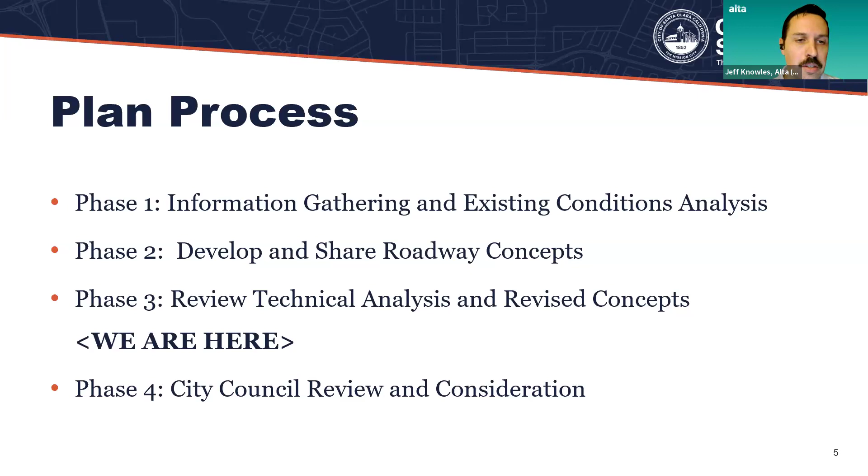In terms of our schedule, we're in those 4 phases. We had our first round of workshops last May to introduce the project and gather initial ideas. We held our second set of meetings in September to share those early draft concepts. And this is our third round of meetings tonight.

And I should mention where we're going from here. We'll have a BPAC meeting, and then City Council is scheduled tentatively for late summer, early fall.

All right, so I want to give you a little bit of background about the project. If you're coming in new to this project, you can go to the next slide. The study corridor is on Monroe from Lawrence Expressway to the San Tomas Expressway. This is a map that just shows that. As you can see, the corridor is primarily fronted by residential homes. There's also a school, Wilcox High School, right in the middle of this study corridor.

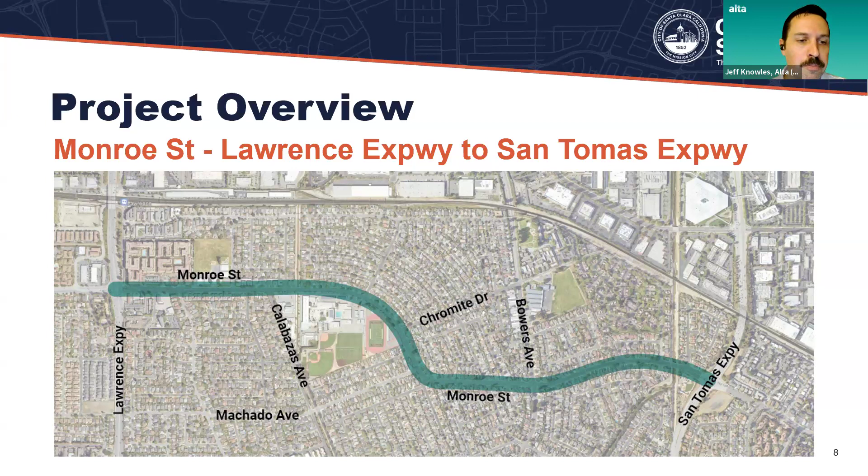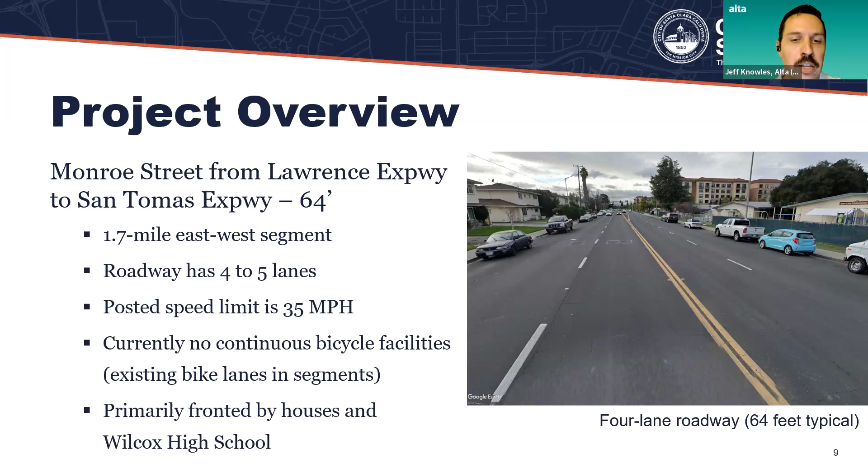In terms of roadway characteristics between Lawrence and San Tomas, it's 1.7 miles long. It varies between 4 and 5 traffic lanes. The posted speed limit is 35 miles per hour. Within the project area, there are currently no continuous bicycle facilities, but bike lanes start on Monroe Street east of San Tomas. The corridor is primarily fronted by residential uses and Wilcox High.

Our first phase of engagement involved 2 community meetings, workshops, an online survey, and 2 pop-up events, along with meeting with the BPAC, which is the city's Bicycle and Pedestrian Advisory Committee.

Phase 2, we had 2 additional workshops, another online survey, and additional pop-up meetings, which are events that we go out and hold in the community. Our staff and team met with the city's Youth Commission, the Senior Advisory Commission, Parks and Recreation Commission, and again with the BPAC. In phase 3, which is where we're at tonight, we're holding a public meeting.

There'll be an online survey, which we're going to talk about and share a link to. We have tentatively scheduled a pop-up event, and then we'll also be meeting with the BPAC to share this information.

Hopefully you saw us at the city's Art and Wine Festival back in September. We also were at the Christmas tree lighting in December. These are our pop-up events where we had a booth sharing out information with boards and gathering survey information and public input about each of the concepts.

In our most recent survey, survey number 2, we had 118 responses, of which 15% were affiliated with Wilcox High School. We asked for the level of support and feedback on each of the proposed concepts.

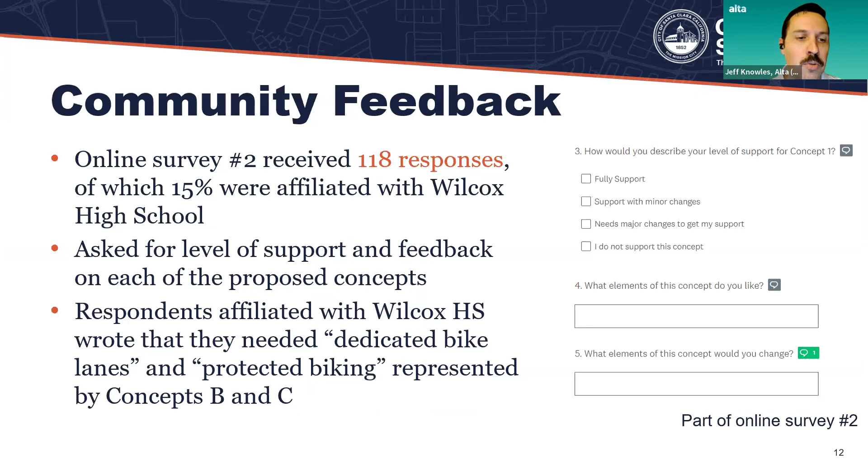Respondents affiliated with Wilcox High School wrote that they desired dedicated bike lanes and protected biking, represented by concepts B and C, which we'll share out in just 1 minute.

Some of the results of these concepts - again, there were 3 concepts that we're asking for feedback on. Concept A is 2 lanes, center turn lane, adding buffered bike lanes continuously along the corridor, and retaining parking on both sides of the street. That received full support at 28.6%.

Concept B, which is going down to 2 lanes, 1 lane in each direction, a center turn lane, and then parking-protected bike lanes, had 51.2% fully supported. This was the largest body of support for any concept.

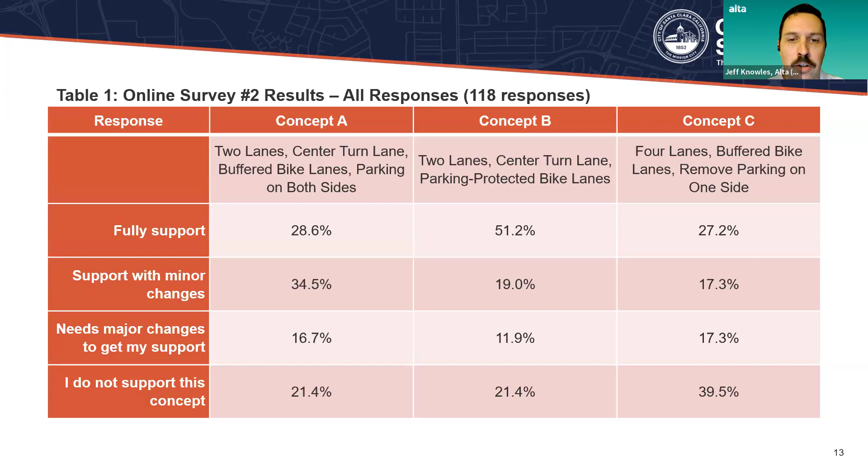Concept C was 4 lanes, buffered bike lanes, and removing parking on one side, which had 27.2%. You can see here the ranking was fully support, support a concept with minor changes, needs major changes to get my support, or I do not support this concept. You can see 'I do not support' was about 20% for concepts A and B, and very large, about 40%, for concept C.

So that was the full 118 responses. When we look just at Wilcox High School, which, mind you, is just 18 of those responses, we wanted to zero in on what the high school community was desiring. For them, concept C, the buffered bike lane removing parking on one side, had the largest support at 60%. They're about evenly split in terms of do not support between A and B, with 33% also for concept B. So a little bit different from the population as a whole for this survey.

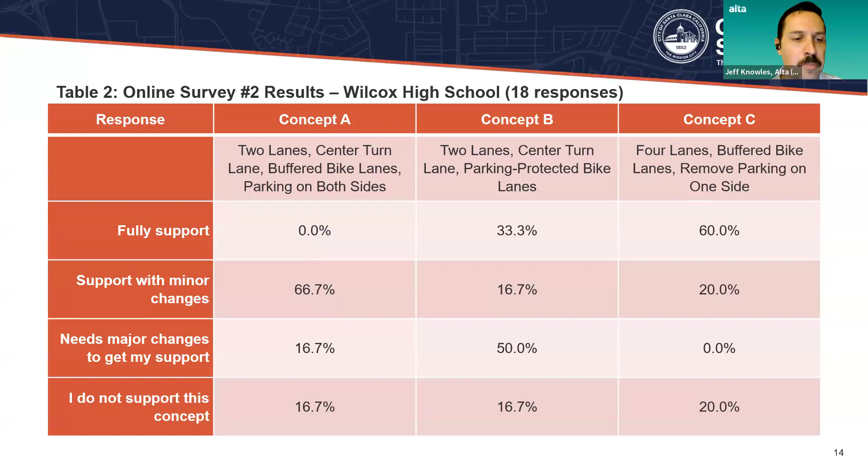I want to go through these again - if you've joined us at earlier meetings, you've seen these concepts, but I want to walk you through them again and then share with you some of our analysis.

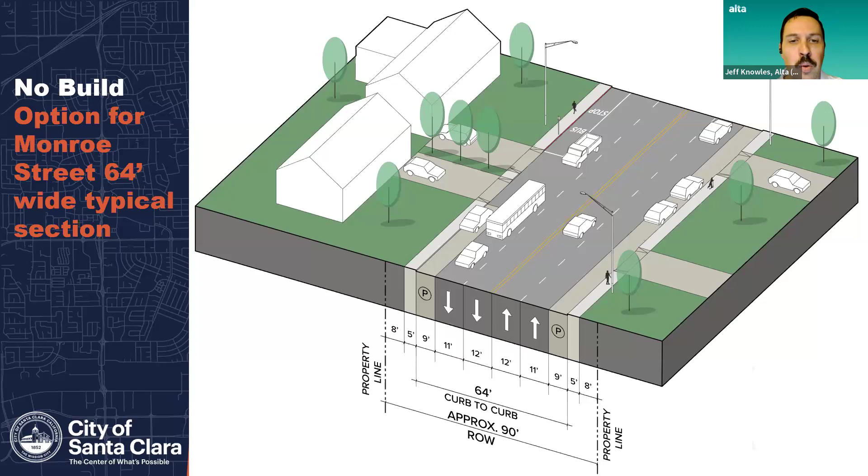First is the no-build option. This is your current conditions - if the city were to move forward with not changing anything, this is what the street looks like today and would look like in the future. Under this scenario, there are 4 traffic lanes and parking on both sides of Monroe. The vehicle travel lanes are 11 to 12 feet wide, and the curb-to-curb width of the street is 64 feet, including the gutter. The public right-of-way is 90 feet wide.

This condition varies from Calabazas Boulevard to Chromite Drive, where there is a two-way left turn lane, parking only along the north side of the street, and parking restricted along the south side. It also varies from Chromite Drive to San Tomas Expressway, where the vehicle travel lanes are 10 feet wide, and there's a 5-foot wide bike lane and parking on each side of the street.

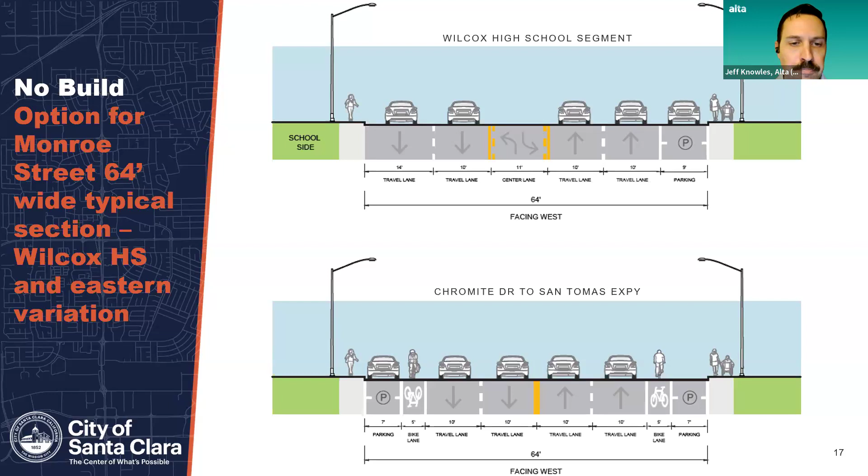The purpose of the study is to look and see if there's potential for adding continuous bike facilities at a higher level of comfort for bicyclists and to make improvements along the corridor.

Concept A is the first concept that makes some changes to the roadway. This concept removes one travel lane in each direction and adds a two-way center turn lane. Parking is maintained on both sides of the street. An 8-foot wide buffered bicycle lane, also known as a class 2 bicycle lane, is added to each side of the street, with 5 feet for the bikeway and 3 feet for the painted buffer.

On this segment in front of Wilcox High School, because there's no parking on the south side already in front of the school, the bikeways are wider, with an 11-foot wide buffered bike lane on the south side in front of the school and a 9-foot wide buffered bike lane on the north side in front of the residences.

Concept B, very similar to concept A, removes one travel lane in each direction and adds a two-way center left turn lane. An 8-foot wide separated bikeway, also known as a class 4 bikeway, is added on each side of the street, with 5 feet for the bikeway and 3 feet of buffer. Parking is maintained on both sides of the street, but it's positioned outside the bikeway to act as a vertical separation or barrier between the bikeway, people biking, and vehicle travel lanes.

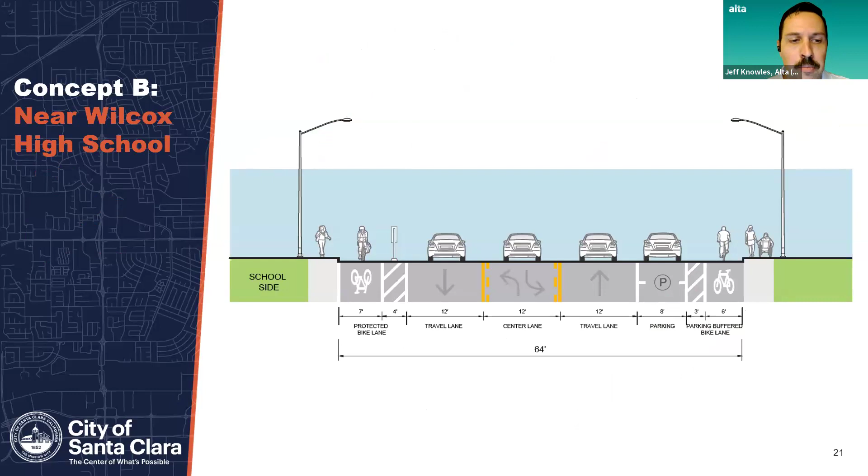On the segment in front of Wilcox High School, because there's no parking on the south side from the school, the bikeways are wider again, with 11-foot wide buffered bike lanes on the south side of the street in front of the school with a physical barrier, and a 9-foot wide parking protected bike lane on the north side in front of the residences.

Concept C maintains 4 travel lanes but removes 1 parking lane. The side of the street where parking would be removed has not been determined in this concept. That would happen at a later phase if the city wanted to move forward in determining that, but we've gone through some analysis about that impact. A 7-foot wide buffered bike lane, a class 2 bike lane, is added to each side of the street, with 5 feet for the bikeway and 2 feet for the painted buffer.

On the segment in front of Wilcox High, again, because there's no parking on the south side, there's less space for bikeway implementation, with an 8-foot wide buffered bike lane on the south side in front of the school that would have a physical barrier, and a 5-foot wide bike lane on the north side in front of the residences that would have no buffer.

Concept C along Wilcox removes all parking along the segment. The other sections along concept C still have parking on one side. So again, just in front of the high school, parking would need to be removed on the north side for this concept.

Now I'm going to walk you through collision, traffic, and parking analyses for each of these concepts. For collision analysis, from 2017 into 2022, which is the 5 years we had the most recent collision data, there were 130 vehicle-to-vehicle collisions and 9 collisions involving a bicycle and a motor vehicle. These numbers serve as the baseline for the no-build, or existing conditions, concept. This is what we would expect this baseline to continue for the next 5 years if no concepts were implemented.

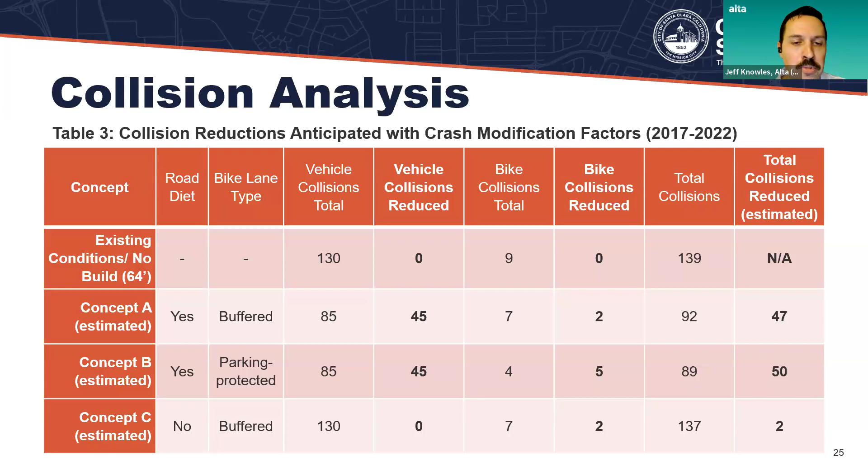Cumulatively, we anticipate 50 fewer collisions under concept B. Under concept C, since there's no road diet, which is where research has shown the greatest safety impacts, there'd be no vehicle collision reductions anticipated, but there would be 2 fewer bike collisions anticipated, so cumulatively 2 fewer collisions under concept C.

In terms of traffic analysis, we modeled the changes in travel time for this 1.7 mile corridor. Currently it takes 10 minutes 25 seconds during the AM peak period going westbound. We anticipate with the lane removal concepts, A and B, that would increase by 76%, an additional 7 minutes 52 seconds to travel the corridor at this high demand period.

In the afternoon period it currently takes 6 minutes 45 seconds, and our estimates show a 31% increase, an additional 2 minutes, under concepts A and B. We also modeled the midday at 7 minutes, increasing to 8 minutes 34 seconds, an extra minute 34. On Saturdays there'd be very minimal impact in travel time.

On the eastbound direction during the AM peak period, there'd be a very small increase, less than 10%, about 40 seconds. The PM peak period would increase by 20%, an additional 2 minutes 16 seconds. Midday would see a 24% increase, an additional minute 46 seconds. On Saturday, a 27-second increase.

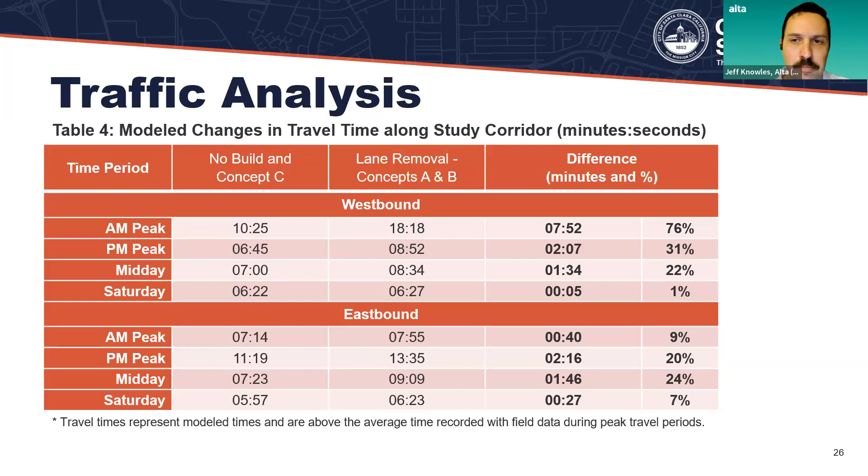We also looked at the level of service, or LOS, at many different intersections along the corridor and along side streets and parallel corridors to evaluate what those impacts would be.

LOS uses traffic speeds, traffic volumes, and the density of vehicles to evaluate roadways, and each intersection gets a letter score from A to F. Scores A through D indicate the intersection meets the city's standards. A through E are acceptable for county expressways, like where intersections cross San Tomas Expressway or Lawrence Expressway, along with state highways. LOS E and F indicate substandard operations for city streets, and F for county expressways and state highways.

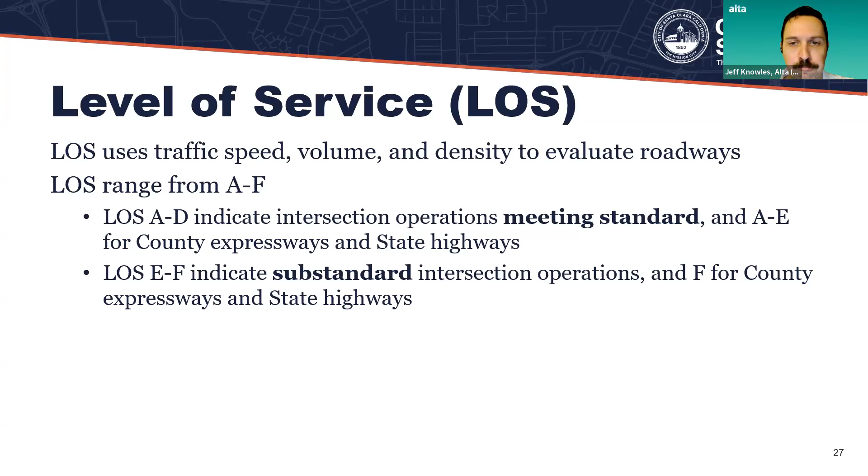When we analyzed the 25 intersections in the study area and on side and parallel streets, in today's conditions, which is the no-build condition and concept C, 21 intersections meet city standards in the AM, 4 currently do not. In the PM peak period, 22 meet standards and 3 do not. Midday, all 25 operate at city standards, and all 25 meet standards on Saturdays.

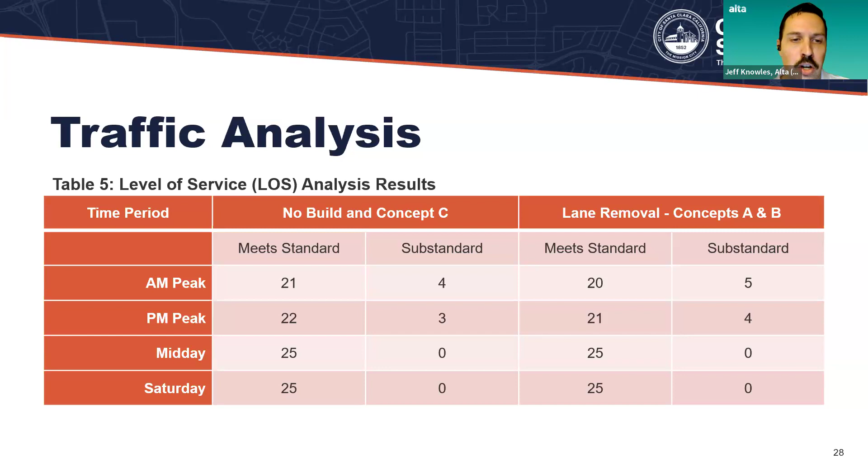Under concepts A and B, we see a change: 20 out of 25 would meet standards in the AM, an additional one, bringing it to 5, would be substandard, that's at Monroe and Bowers. In the PM peak period, there'd also be an increase of that one intersection, Monroe and Bowers, going from 3 substandard today to 4 under these concepts. There would be no additional change at midday or on Saturdays.

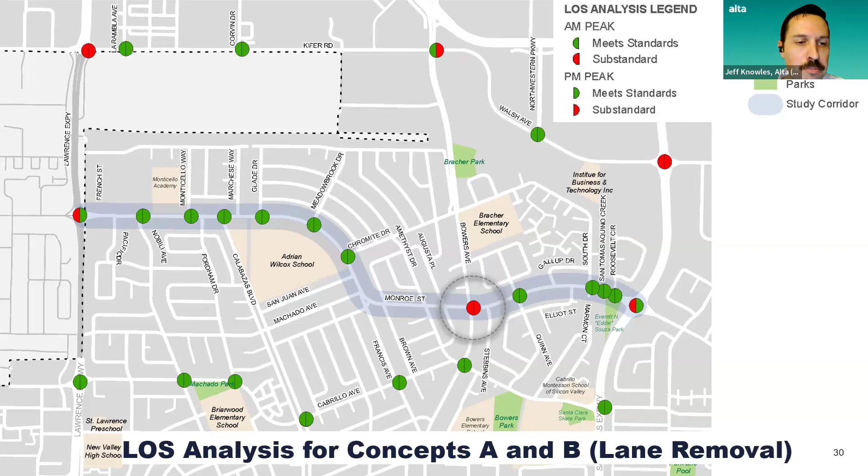We also looked at parking analysis. Monroe Street accommodates currently 318 parking spaces along the study area and 884 parking spaces on the immediate side streets, looking 500 feet up on both sides from every Monroe Street intersection. We looked at utilization rates, calculating the number of parking spaces available by the number we counted.

We counted these spaces on weekdays and weekend mornings, afternoons, and overnight. Under your existing or no-build concepts A and B that do not affect parking, 38% is your overall utilization. On the north side of Monroe, slightly higher demand, 39% of available parking spaces are typically used. On the south side, typically 36% of available spaces are used. So about 3 or 4 out of 10 available spaces are typically taken.

The same is true for the side streets, about 37% are typically parked in. Under concept C, the city would need to remove parking on one side, and we modeled it for both sides of the street to see the impact. Under each scenario, the city assumed the vehicles that typically park on, say, the north or south side of Monroe would park across the street, occupying up to 100% of the typically available spaces for each block. And if there's not enough parking directly across the street to meet demand, the analysis assumes the remaining demand would be met by parking on the closest side street.

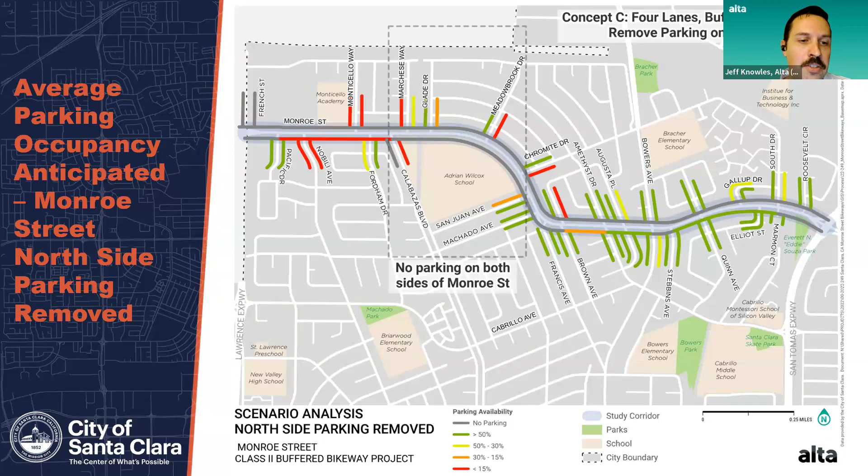This map shows the anticipated impact of parking removal if we took parking off the north side of Monroe and moved the majority of it to the south side. Again, there could be available parking on the eastern side to accommodate that change. You can see in green and yellow, but there would be higher demands certainly going west, more going into side streets and the south side of Monroe. So it would have an impact to available parking under this scenario, going from 36% available typically on the south side to 56% utilized.

The flip side of this: if we took the south side of Monroe off to accommodate that bicycle facility and moved it to the north side, a very similar situation -- the east side of the corridor could accommodate that using available parking on street or on side streets. But going Meadowbrook Drive heading west becomes higher demand, less availability, more difficulty finding on-street parking. In this scenario, it goes from 39% today to 49% utilized across the corridor.

I want to walk you through some next steps, and then we'd love to hear from folks who are on the call tonight and answer your questions or get your feedback.

Again, just to flash up, here we are and the schedule. We are looking forward to collecting information from you here tonight, from the public, through these workshops and through our online survey, which we're going to share with you in just a second. We'll be going to the city's Bicycle and Pedestrian Advisory Committee, and then to council in late summer, early fall for their review and consideration for next steps.

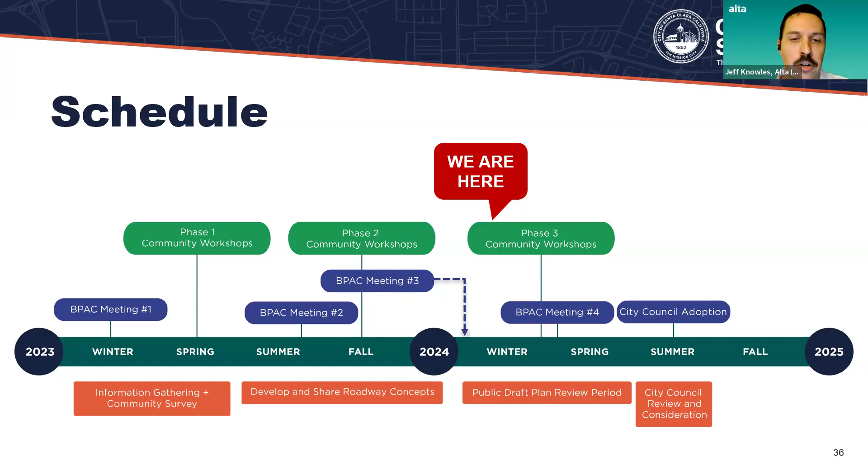All right, next slide. There are lots of ways that we invite you to stay involved in this project. The best resource right now is the project website, that's santaclaraca.gov/bikeped projects. You can send us an email at monroestudy@altago.com, or call and leave us a voicemail message. Our number is 408-320-7060. Again, we don't have the staff to provide calls back or to answer the phone, but if you want to leave a voicemail message, if emails or using the internet is not your preferred way to communicate, we wanted to provide this resource. You can also attend future public meetings.

We don't have additional community workshops, but there will be public meetings available, including our upcoming BPAC meeting, which is going to be held on Monday, January 22nd. Mostly the same information that we're sharing tonight will be shared with the BPAC to get their feedback, but you're more than welcome to attend that.

There's also the fall city council meeting. You can check the website for updates when that is scheduled, or you can get an email update from us if you request to be added to our subscriber list. Just send us an email, again monroestudy@altago, and ask to be put on the email updates, and we'll share that out once that meeting is scheduled.

At this stage, George, my colleague, is going to share out the survey link. There's a QR code - if you've got a phone available, you can click over, and I'm going to share with you what the survey looks like. This is really where we're hoping that you can share this with your neighbors, with your friends and family, with work colleagues, other members of the city. We want to get a robust response to this survey. So George, if you can share the survey link, and then I'm going to show the members of the public who are here with us tonight what that survey looks like.

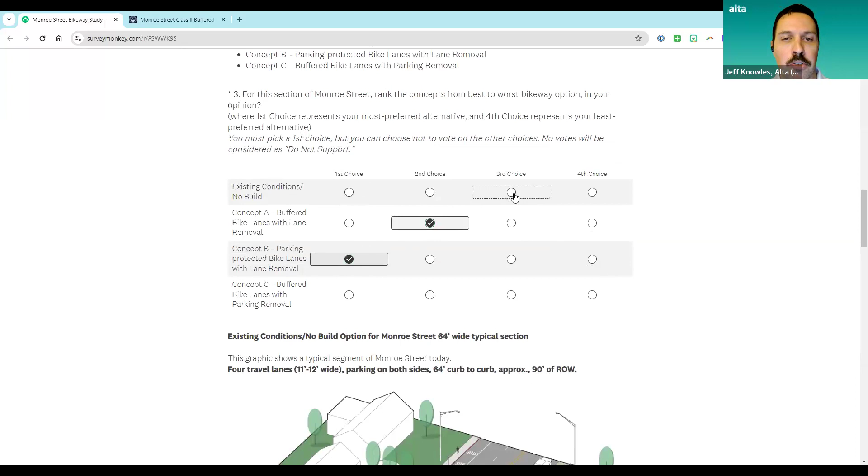So if your first choice is concept B, parking, we would list that there. Concept A, maybe, is your second choice. Maybe your 3rd choice is the existing conditions, no build, and your least preferred is concept C. You could do it like this, and each of these can be changed.

Again, you need to list at least your top choice, your preferred option, and ideally you would list your second, third, and fourth options as well.

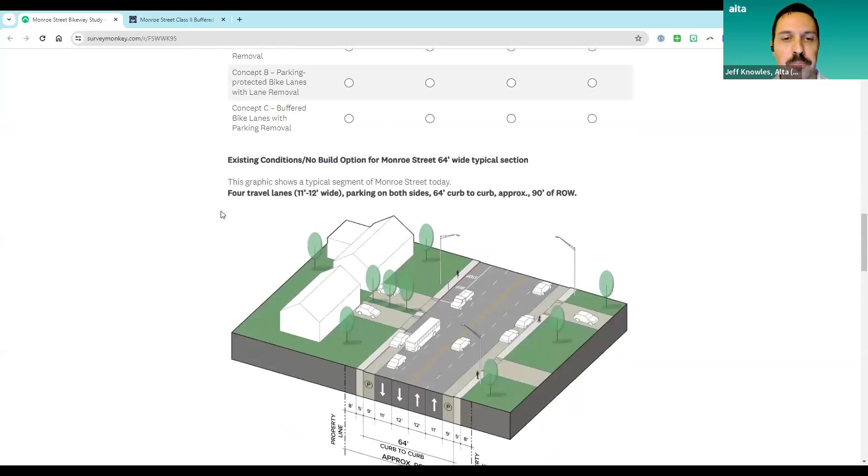The survey includes a thumbnail and additional information just to remind you if you want to review these concepts again, with the dimensions and showing the changes to the roadway concepts.

Question 4 is optional. You can provide reasons or rationale for why you supported your preferred concepts, or you can leave general comments about the project for the city to review. And then also, if you want to be notified about updates, including any future events, you can provide your email address. Just as a note, your email address is not going to be associated with your responses. We'll keep that in a separate subscriber list just to make sure you get updates about those future events. Once you're done, you click submit there, and it will go into the survey results.

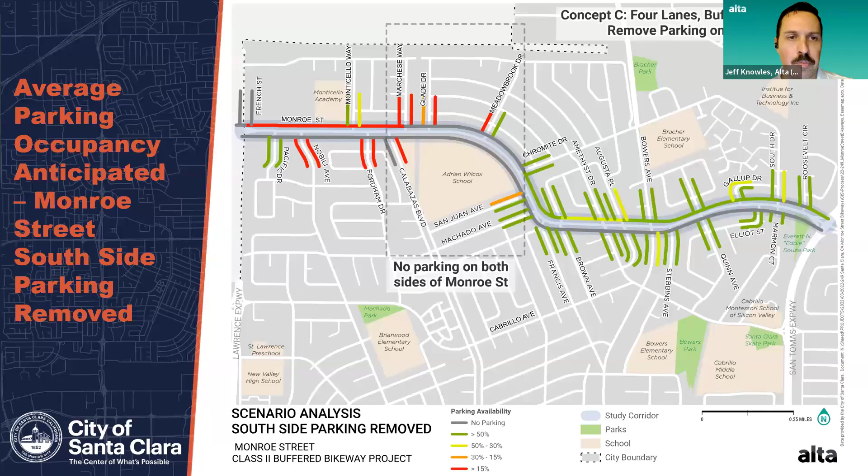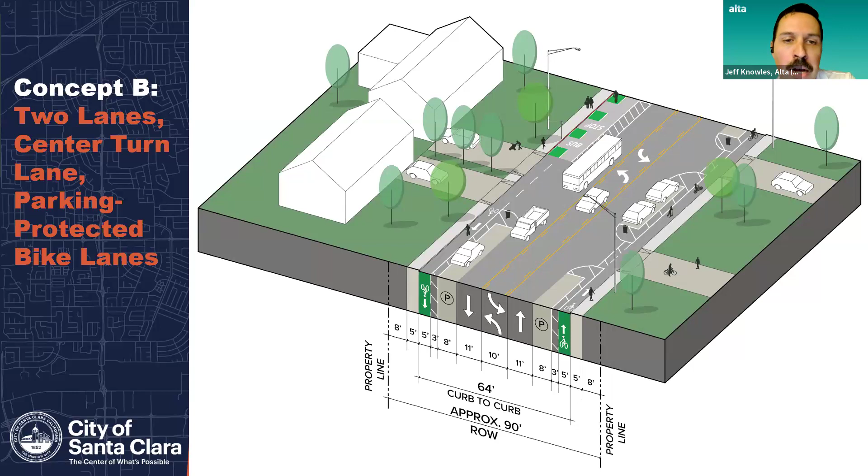If you go to the next concept, concept B, this is where we have 2 lanes, a center turn lane and parking protected bike lanes. Under this scenario, the bike lane would be flush against the curb, and it would be in the middle of the bus stop. So here the bicycles would proceed through the bus stop, and a bus would come, stop there, pick up and drop off passengers, and then merge back into the travel lane. If a bicyclist was coming behind a bus, they would need to wait until the bus had taken its passengers or people had left the bus, and then proceed straight.

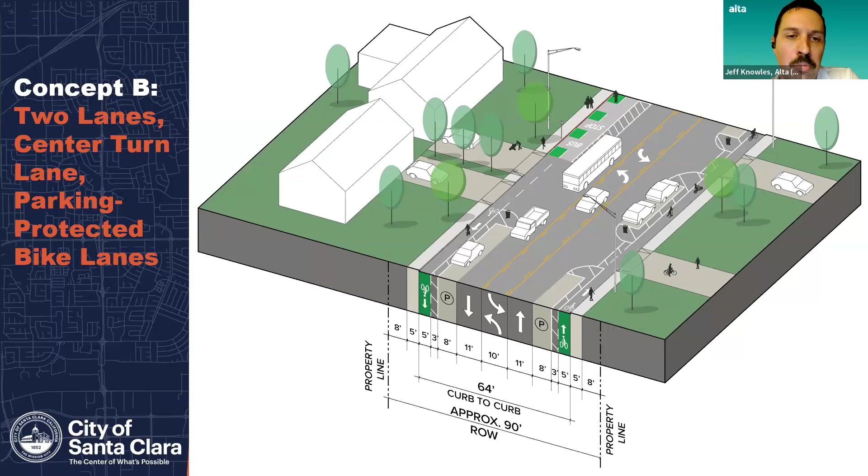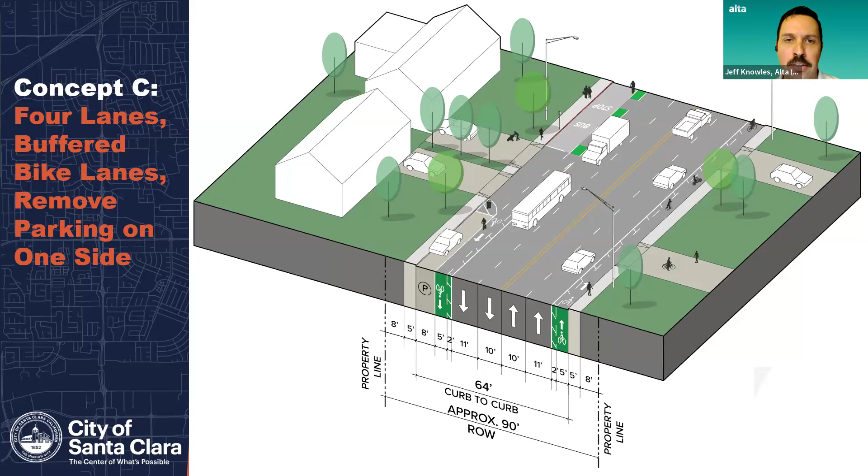Next question on the Q&A window comes from Tom: Will this project be contracted out, or will city staff do this? Ralph, do you want to answer that question about next phases? I think that may apply to the detailed design along with the construction. Yeah, for something like this, if we're talking about design and construction, this most likely will be a subcontractor or consultant to perform those tasks.

Great. And again, you'd have to go through finding additional funding for both those phases. There would be additional public input in the detailed design phase, and then it would be going through procurement and going through bidding for construction.